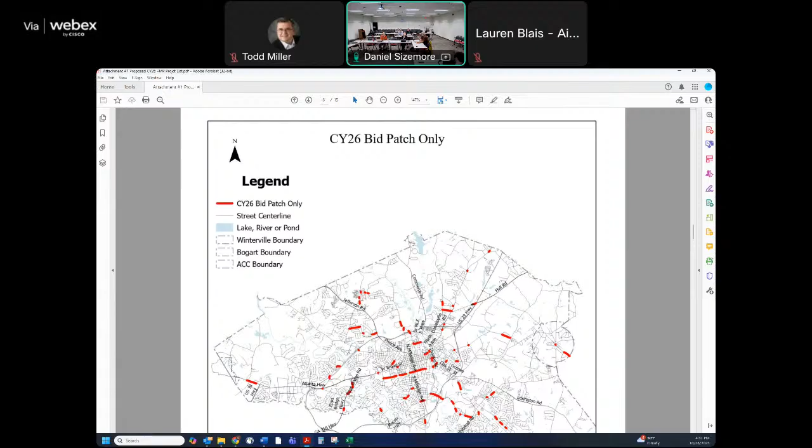The second list and second map is preventative maintenance. Daniel can scroll through to show the list as well as the map. Let's go through the maps first so y'all understand what they are. The preventative maintenance list, which is patch only: 220 roadway segments totaling approximately 53.9 lane miles of roadway at an estimated cost of 2.2. The majority of this work is performed on arterial and collector roads due to their rating. There are a couple of local roads on that as well, as I remember.

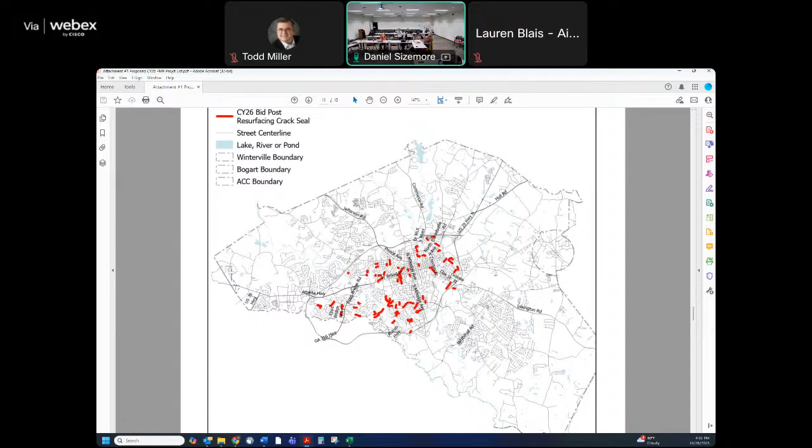We have post resurfacing crack sealing that we do every 4 to 5 years. That is included in those lists as well. So that's patch only and post resurfacing crack seal, 2 different applications. On to bid alternate number 1. This is the crack seal. Yes, I'm sorry. It was separated, but in my agenda, it was combined. 2 different maps, but combined in my agenda item.

Just to give some context, the crack seal is when you see the tar. Whatever we paved 4 years ago, we do crack seal on the 5th year. That's basically the tar squiggles you see on the road. Patch only is usually a section of pavement. It's a higher cost per square foot, but because you're not doing the entire roadway, it is more cost effective for the corridor. Patching at depth. In other words, you're dealing with structural issues in the road, potholes that have expanded, cracking, that kind of stuff.

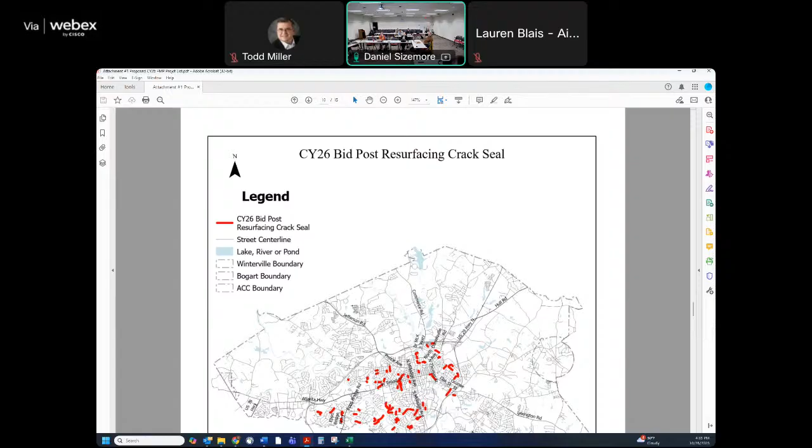Yes. So you're not as likely to get something like a lane redo, or you can't really change the striping because there's still the old striping in the sections that weren't patched. Correct. And we do strategically patch, but depending on your patch size, a lot of times it winds up being full lane width to tie joint to joint and not have a future maintenance issue.

I will back up: your post-resurfacing, your resurfacing for local roads, does include patching, chip seal, and resurfacing, and a milling operation. So that is a more in-depth operation to resurface our local roads than specifically the patch only and the post-resurfacing crack seal.

So then resurfacing is the total overhaul? Or is that just? The resurfacing includes patching and chip seal, milling the existing roadway in some situations, and/or overlaying the roadway with 1.5 inches of asphalt. Okay. Yes.

Is College Station under your jurisdiction or is that GDOT? It is. It's under you. Yeah. And it is highlighted in the group that would receive patch only. Well, I bring it up because last summer there were a lot of lanes for several blocks that were redone, but they paved over many areas where there's no bike lane marker left. It's just pavement. They didn't restripe the bike lane.

That's where we did our repatching. And it still hasn't been restriped? It still hasn't. What's the location on that? Basically, College Station from East Campus to Barnett Shoals. I just drove it today and I know what you're talking about. They put the car dotted separator, but they didn't put the solid bike lane. You're just there with a wide lane. Is that something we patched this year? It was done over the summer.

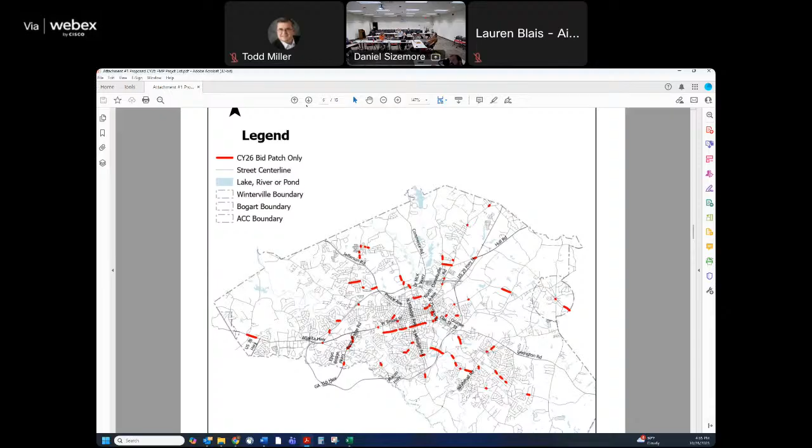We'll confirm. If that is the case, my understanding is pavement management staff are currently working to confirm that all areas that were patched are restriped. So they're going through that process right now on the 25 program. We've completed all resurfacing and patching. So it's now utility adjustments for manholes and water valves and striping to remain. Okay, good.

Do you contract this out or is it done in-house? It is contracted out. So if a contractor's work is substandard, do you want to know about it? If the contractor's work is substandard, yes, I definitely want to know about it. We keep an eye on it. We have an inspector there if they're performing work of any type. There are situations where we may have multiple operations, and the inspector's moving from one to the other. That sometimes occurs. Good to know.

Sometimes failures also happen after work is done, so we have a warranty for a year. Please let us know if you see anything that you think is not right or should be better. Shoot us an email, send us a picture, location, exactly. Anything is helpful.

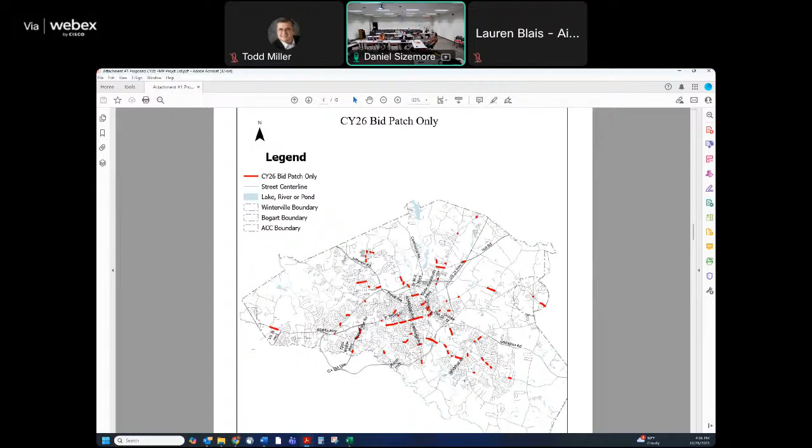Just to let y'all know, after we complete our work, once we give them substantial completion, we give 30 days for final. We'll give them a correction list on all the work that was performed, and they have those 30 days to address that. Then from final completion, we have a 1-year warranty. Now I will say that if a utility, for example, caused damage to their asphalt, that warranty will not cover that damage. But if it's their work, then yes, we can hold them to it.

And the last thing is, not every time you see fresh pavement in Athens is it repaving. Sometimes public utilities has done it, such as on Baxter Street. So there may be cases where you call to say this is not done well, and it may not be our department. A lot of that's going to be us cross-referencing where you're reporting with what project. If we know that PUD is doing work in that area, then we convey that over to PUD. And it's still good to report though.

Yeah, we are the keepers and maintainers of all roadways in Athens, with the exception of anything GDOT. Even on GDOT, see something, report it to us. We will make sure it gets done by us, GDOT, the developer, or our contractors. Anyone doing work in the right of way is supposed to comply. We only have a handful of land development inspectors, so we can't be at 100+ job sites. So if you see something, let us know, and we will address it as soon as we can.

We do communicate in compiling this list. It's not just the critical data from a PCI standpoint and the area of the county map. It is location, PCI, work in the area; we talk with land development, we talk with public utilities, and we try our best to vet our list to avoid areas where they're already working, for example a sewer upgrade, a water upgrade, or a big development. A lot of times that's where we get caught. We have a list of roads and a developer starts building and gets permitted after we do that, and it didn't come out in our coordination. Then we pull that road and put it at the bottom of the list to see if they complete their work before we finish ours. We'll come back and address it. If not, it goes to next year's list to be one of the first.

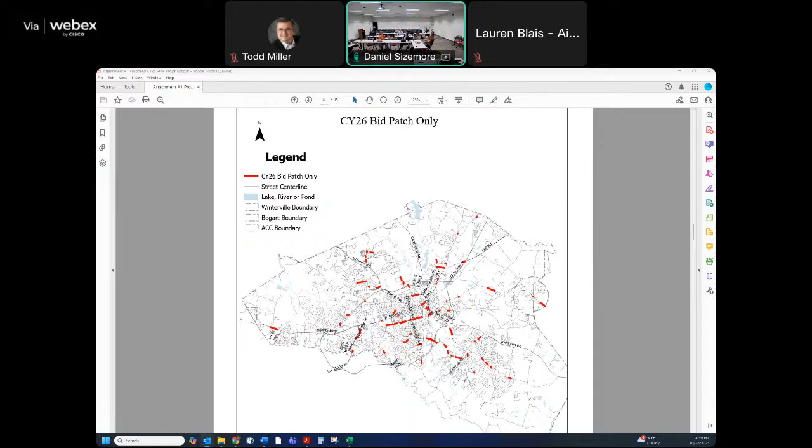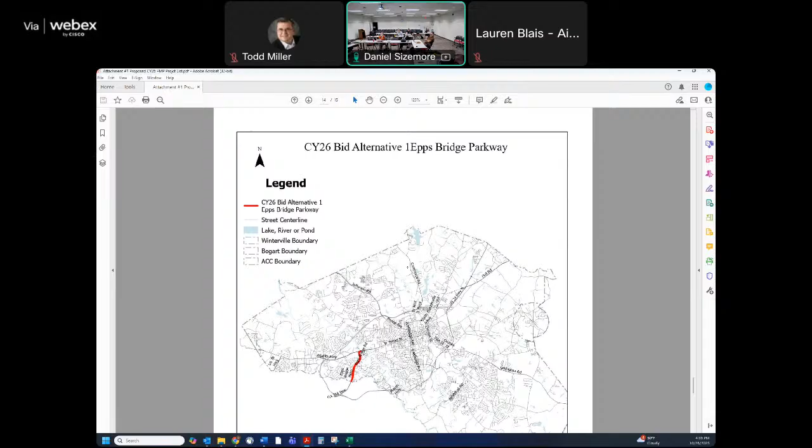I think maybe I had a few more questions. I wanted to let you finish. I have one more, and it's bid alternate one. After we looked at all of the arterials and collectors in Athens, one of the lowest rated based on individual segments, and after we looked at the average, we put together a bid alternate to do resurfacing and rehabilitation on Epps Bridge Parkway. We did some preemptive patching in 2025's PMP on Epps Bridge, and that should allow us to walk into this one if Mayor and Commission so decide to resurface it.

This is approximately, in our agenda, it says 19 segments. After going back and vetting inside the data, our GIS data had one segment listed as US SR 316. I don't know why, but in correcting it, there are 20 segments. All of the measurements were included in our estimate, so all the pricing is correct with the lane miles. It's just the fact that the number of segments was incorrect.

Bid alternate one, just to clear this up, there is no bid alternative two, it's just one bid alternative. What this allows us is to be able to award the base bid without the bid alternative in case prices come up too high, because we don't want to have to rebid again. That's another 60 days of sitting and waiting, and a lot of work on staff. So we've done this before on bid alternatives. We do expect to have enough money to pave this.

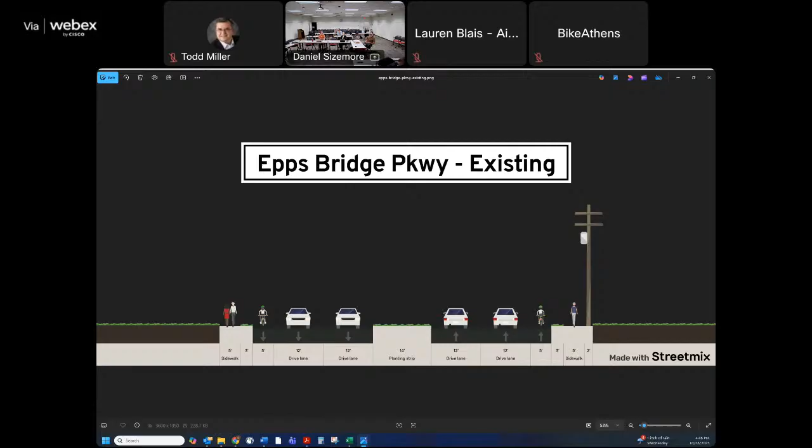Ronnie, we don't have a final staff recommendation I can show you yet — just a preliminary sketch. This is not what we are approving or contemplating at this point.

So, just to show, this is what is out there currently, and this is the proposed alternate.

I'm not saying we're going to paint them green, but I just mark it as such. It's much better because it's 6 foot versus 5, with 2 foot where possible for the buffer.

The planning office had the recommendation of a 10-foot inner lane and 11-foot outer lane, based on conversations with transit. That could also reverse, since transit prefers the 11-foot lanes on the outer side. They also said 10.5 would work fine for transit vehicles. For emergency vehicles, we're anticipating they'll say the left lane should be 11 feet, and they probably won't be okay with 10.5.

So there's still a lot of conversations to have. This is just that first pass. Ultimately, the recommendations are based on speed and everything.

Within the new updated NACTO and AASHTO bike lane guidelines, 2 feet is the minimum recommendation for a buffer, and 6 feet is the recommended standard width of a bike lane, especially given the increase in cargo bikes and bulkier trailers people use to carry kids. The 5-foot lanes are really hard to navigate with that.

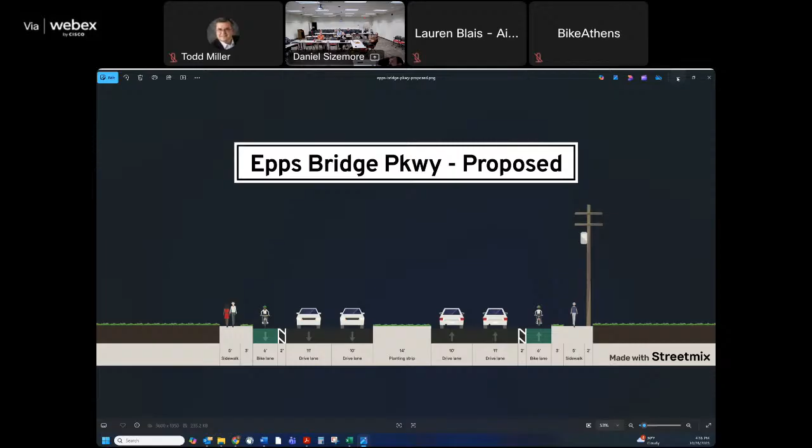So all right, I'm gonna kind of start to wrap this up here, but I think we like what we see. We like the horizontals, we like the lane narrowing, and we don't have to be specific about numbers. We don't have to play engineer there or anything like that. We know that y'all are gonna try and work on that if possible. We like the horizontal separation.

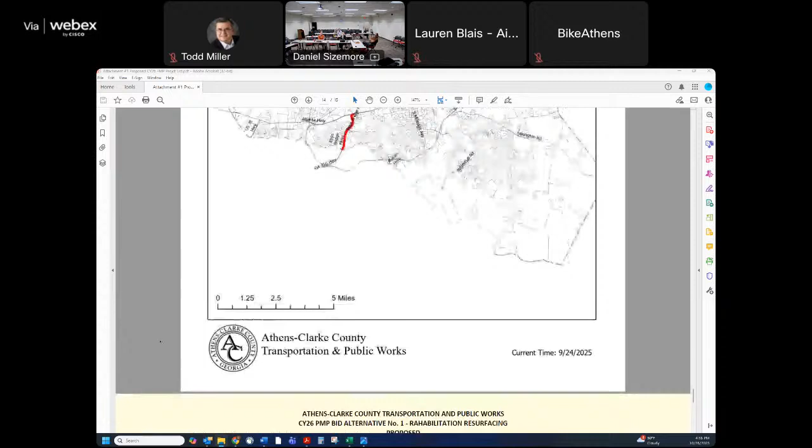We'd love a potential, if there was money, for some kind of vertical barrier or some kind of sound sort of thing. Again, we're not gonna play engineer on that. We're just gonna let the profession decide what would work according to the up-to-date guidelines. We'd love to see the next better version of Epps Bridge Parkway that is more safety minded. And we like the direction it's headed.

That sounds great. Yeah. Of course, you have an example on hand you guys have seen and recommended approval for. It was built a few years back, Lumpkin Street. We have an enhanced bike facility there with additional markings. When we repaved Lumpkin, we restriped it from Broad, wider lanes from Broad down to almost Five Points. It was like Rutherford. Yes.

Yes. And we got 2-stage turn queue boxes, buffered areas where there previously weren't. Yeah, there's some nice green on there. One thing that you did there, you're not doing here. I don't think there's an opportunity for a mid-block crosswalk. We added an RRFB island. Yeah, okay, yes.

And essentially, what we would likely do is, I showed y'all the generalized concept of the corridor. We would need an engineering design firm to design the actual striping layout and include any modifications to intersections. So the big thing here to note is it's paint and asphalt. It's not concrete, unless there was an instance where we wanted to add in a mid-block, but I can't think of a place for that. The speed, the signal system, the curves make it a challenge.

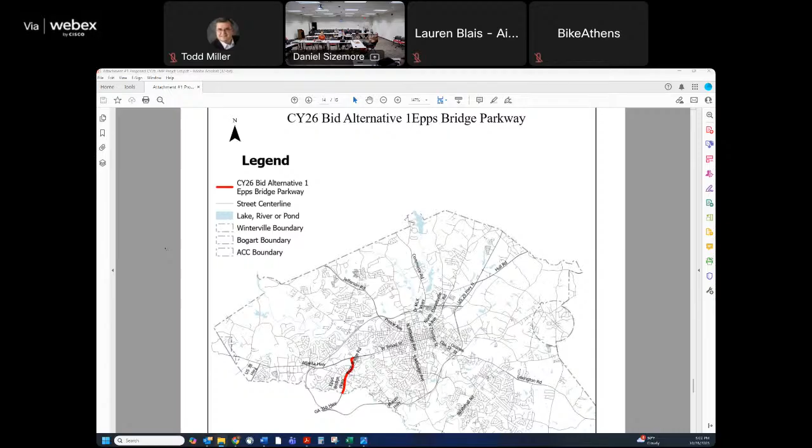I'm going to move this on. We're definitely kind of behind in our meeting right now. But that's okay. Maybe we might have to just take some from regular staff updates. I'm going to bring this up because there's some notes here that Daniel has on Barber Street. Yes, I can run through this. It's not that intensive, but I want to leave time for questions.

It's a recommendation in the agenda item that's moving forward. I believe the vote is December 2nd, so it'll be a November, December cycle. Approve the proposed preliminary plans. They are currently preliminary engineering at 60%. Usually we do 85. For this one, the commission-defined option asked us to do 60%. So we have preliminary engineering for the whole corridor from segment 1 through 4, which is from Chase Street to Prince. I can bring it up. So that's approve the preliminary plans and right-of-way plans for segments 1 and 2.

And then approve the proposed new project concepts for segments 3 and 4. We are working out some issues with 3 and 4 from a design standpoint, so those are proposed new project concepts. And then authorize staff to advance preliminary plans for segments 1 and 2 to final design, right-of-way acquisition, and bid phase, which is the next phase in all of this, right before bid phase, right before construction.

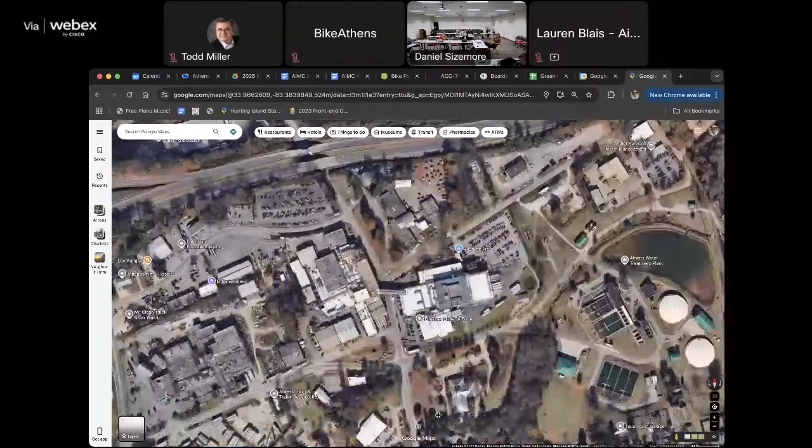So that would be the segments from North Chase Street to Oneida. Those are segments 1 and 2. Those are really straightforward. The utility issues are pretty straightforward. We can go ahead and move forward with construction on that. Then the next bullet point says authorize staff to advance proposed new project concepts for segments 3 and 4 to the preliminary design phase. So basically getting that to, I believe it's 85%. So it's keeping it in preliminary design.

The shortest way to explain it is y'all may be aware that there are utility poles within the buffer strip sometimes between the road and the sidewalk. That is a grandfathered in situation. Utility companies are no longer allowing utility poles in that strip, which means they have to be on the outside of the sidewalk, or no closer than an X distance based on the speed of the road. So a higher speed roadway has them further back. There's a whole table for it.

All of the utilities that go through here, for instance the ones on the left side of the screen, since we're not doing any changes, those are grandfathered in, those would stay there. All the ones on the right side, they will not be able to be moved in once we narrow the road to make room for the active transportation area. They can't be moved in. So we have 4 or 5 options, I believe, of what we can do to deal with that.

Ultimately, those options range from leaving them in place and splitting the path to go around them, all the way up to burying utilities, which would be, I believe, minimum $10 million for the corridor. That's just utility, and that's just from the power company. And so we have to do it and they're not gonna pay for it. That is also still being discussed. So there's a whole conversation about prior rights. I haven't been updated on any changes to that, but there's a separate conversation going on about prior rights and who would be required to pay for that.

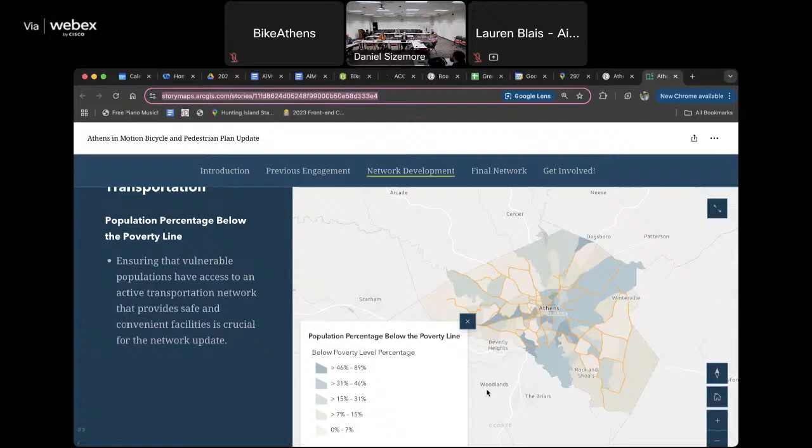Y'all also maybe noticed the last version had comment on the wiki map, and we also had provide a public comment to our Athens in Motion meetings. We felt that it was a little confusing. We made an executive decision, while this public engagement is open, to just have the one link for the survey on the webpage, and we can put those back later. But there is still a way to provide public comment to the commission through the commission webpage. Ultimately, this is already shared with the public; it's more about getting the word out, to followers of the Athens in Motion page, to organizations like ADA groups that might be interested.

What we're asking in the survey is essentially a lot of questions about how we will prioritize these projects. We've determined the network development and the final network that staff are recommending: here are all the projects that will be in this plan. The next step is to say, how are we going to prioritize this? There are scenario type questions of, would you prefer to fund things this way or this way?

And there was a pop-up event during Porch Fest. I think we had 25 people come and participate. There's opportunities for the communications committee to table on their own. I don't know if it'll have all the same elements, but I had just gone through a surgery, so I wasn't able; I popped in the last hour. Lauren was there for a longer period of time than I was. So just want to thank everyone for coming out to table at Porch Fest.